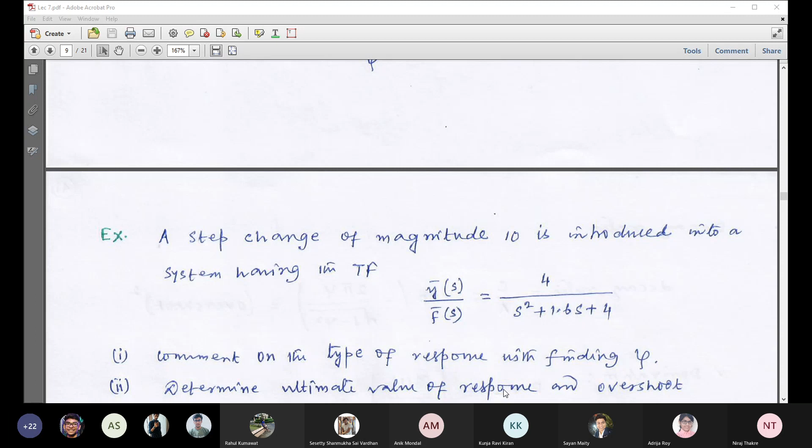Now you find the rise time. Third question is: calculate the rise time.

Rahul Kumawat. Rahul, can you hear me? Rahul Kumawat. No answer. Sneh Bandhu Singh. Yes sir. Did you get the value for overshoot? Doing, sir.

Kunja Ravi Kiran, rise time will be? Yes sir, I am coming to Vardhan. Kunja Ravi Kiran, what value did you get? Yes sir, 1.08, using the formula you told us in yesterday's class: TR is equal to tau by root over 1 minus zeta square, into pi minus tan inverse of root of 1 minus zeta square by zeta.

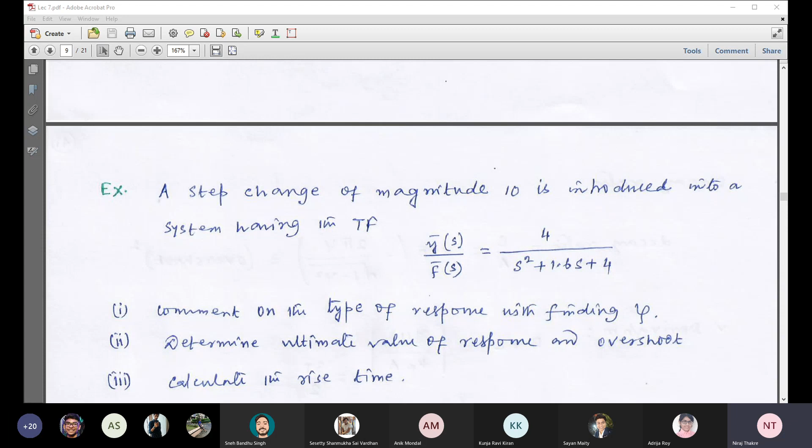See, I am showing the answer now. I think most of you did it. So you fix your target to make the last term in the denominator polynomial 1.

Always you try to do it: make the last term in the denominator polynomial 1. Then the equivalent term we know is tau square s square plus 2 zeta tau s plus 1. Accordingly, you can get the values. I repeat, the last term in the denominator polynomial, you try to make 1, and then compare with the standard transfer function to find all these values: kp, tau, and zeta.

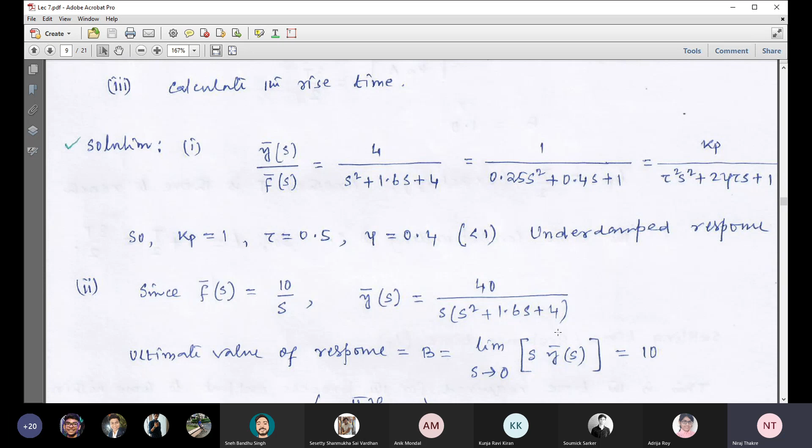Okay. Ultimate value of the response we get by using the final value theorem, shown here in the Laplace domain. You can also use the time domain, where limit t tends to infinity, y of t is there. But it is wise to consider the formula in the Laplace domain, because the transfer function is given in the problem.

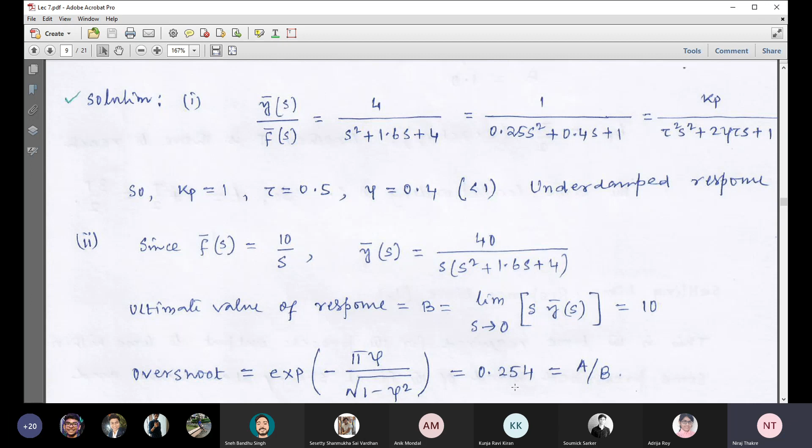For overshoot, directly we can use our equation, since all the values are already determined. Only one value is needed, that is zeta. And then the last question was rise time, which requires the expression needing two parameter values: one is tau, another one is zeta.

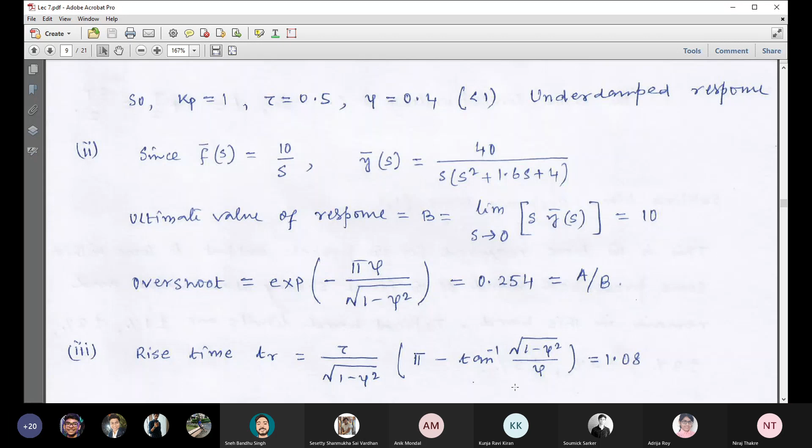So next we will start the second order systems. We already know these two types of second order systems. In fact, we discussed 3 types of second order systems. First one is connecting 2 or more first order systems in series. If we connect 2 first order systems, we will have second order dynamics. If we connect 3 first order systems, we will have third order dynamics. If we connect 4 first order systems in series, we will have fourth order dynamic response.

And the second one is, if we include a controller for a first order process, we will have a second order process. Another multi-capacity process we discussed basically considers the mechanical or fluid element in a process, that is the elemental part. Basically we are discussing the process control part, we need the complete process, that's why we are not considering that.

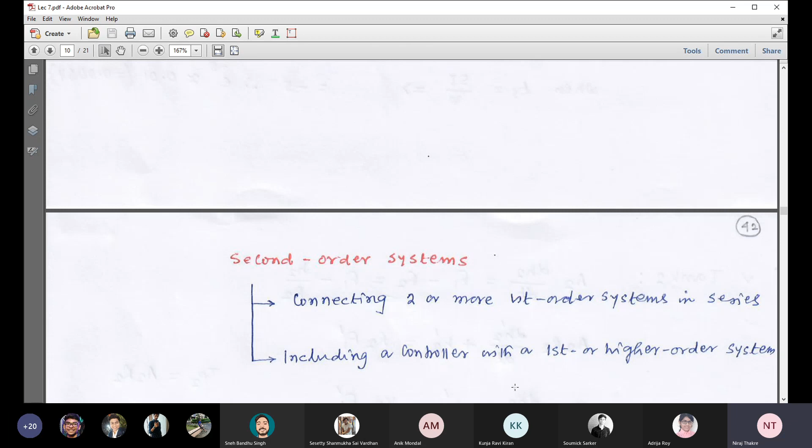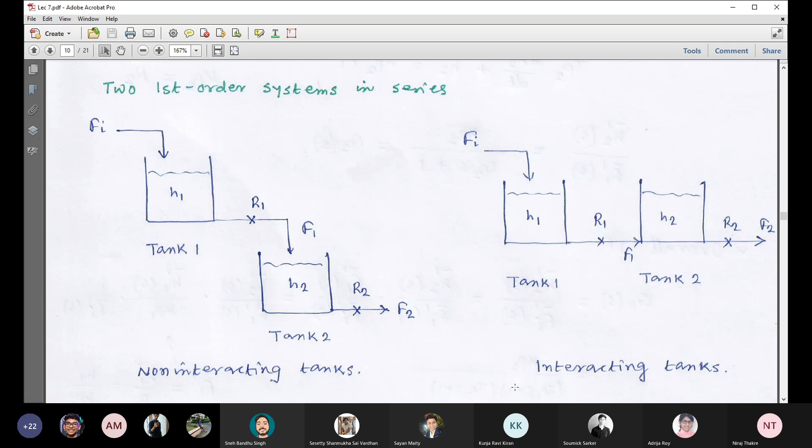Now let us discuss these two system examples. We'll go first with the non-interacting tanks. What we want to see, our target, is we have connected two first order systems in series in both the cases, and we want to investigate whether the overall transfer function is second order or not. This is our primary goal. I repeat, two first order systems connected in series, and we want to investigate whether they are yielding a second order transfer function or not.

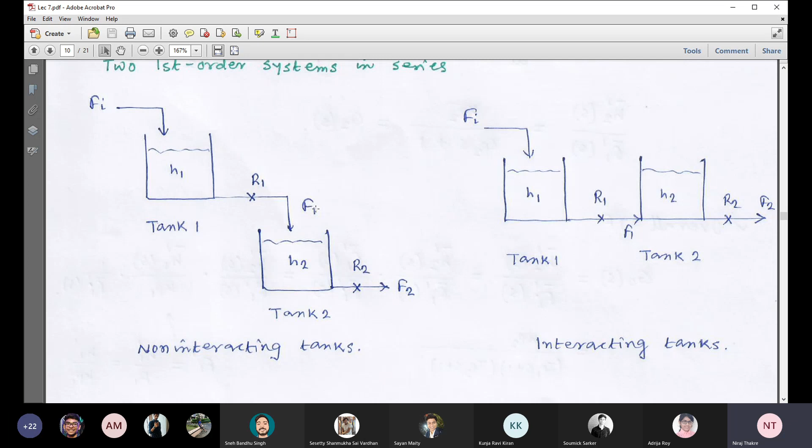Let's consider first these non-interacting tanks. For this we need to develop the individual transfer function for tank 1 and tank 2, and then find the overall transfer function. I repeat, we need to first develop the model for tank 1, followed by tank 2. Then we will develop the individual transfer function for both the tanks, and finally find the overall transfer function. We want to check whether that overall transfer function is second order or not. Let's proceed.

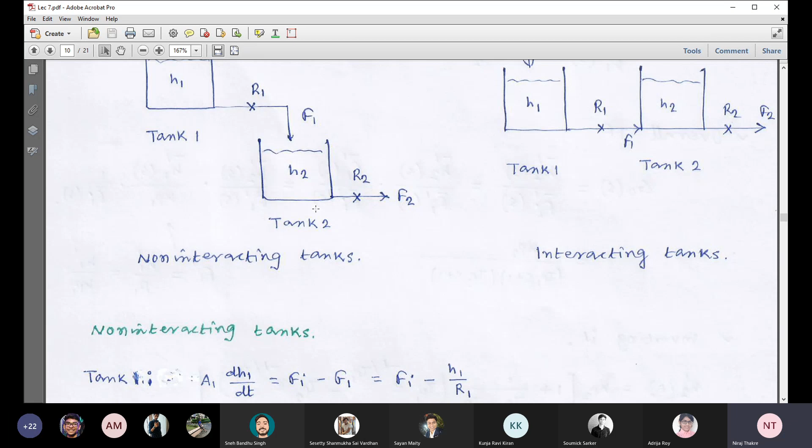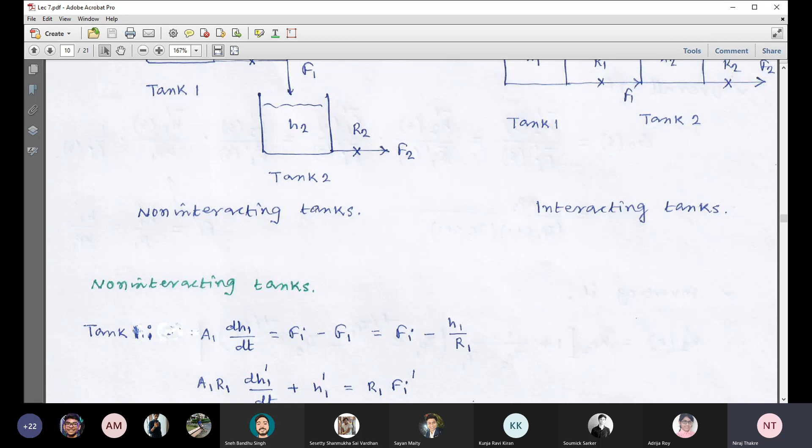This is the model equation for tank 1. So we can write it in terms of deviation variables. I already mentioned that we can directly write the model equation in terms of deviation variables. For that, you just need to identify the variables and put the prime symbol over those variables.

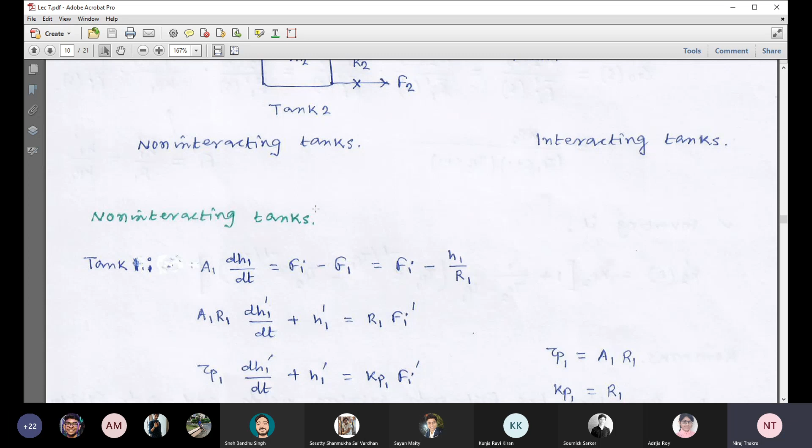Now we can rearrange this equation, or rewrite it in this form. We have written this in terms of time constant and gain Kp.

So what is our transfer function? Our transfer function is output H1 and input Fi. So output by input equals Kp1 by tau p1 s plus 1. So for tank 1, this is our transfer function G1, which is obviously the transfer function of a first order lag system. This is the transfer function for the first tank, and we are expressing it by G1, and this transfer function is nothing but the transfer function of a first order lag system.

Can you now determine similarly for tank 2? Do it quickly. Let me know the transfer function for tank 2. Just follow this same approach.

Find the transfer function for tank 2. I have shown for tank 1. Now you go for tank 2. It is quite similar.

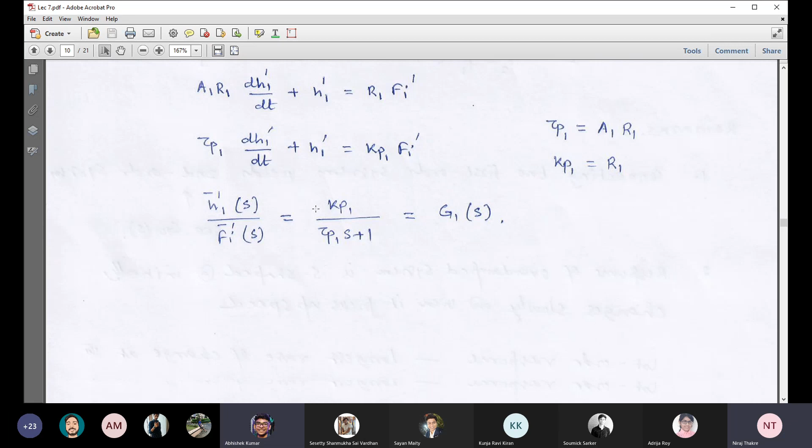Yes. Anyone else got? Yes, sir. Same expression you got? Yes, sir. Kp2 upon tau P2 S plus 1, and Kp2 is R2 and tau P2 is A2 into R2.

Yeah. Now verify, I'm showing now for tank 2. Fine.

So what should be the overall transfer function? Tell me what should be the output, what should be the input in the overall transfer function. Overall means we are just considering both the tanks. Can anyone tell what should be the overall transfer function for both the tanks?

Sir, Kp2 divided by tau P1S plus 1 into tau P2S plus 1. Oh, great. What's your number? 19CS10009.

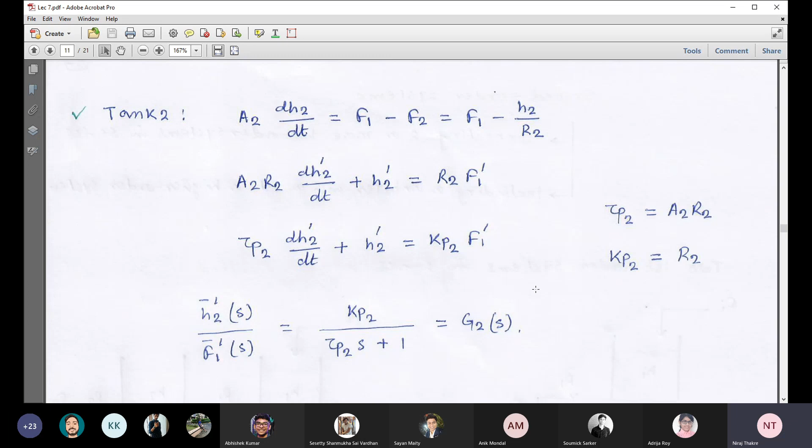See, now I am showing. If you consider both the first order tanks or liquid tank systems, our output is H2 and input is Fi. You can revisit the schematic diagram. If we consider the entire system or both the tanks, our output is H2 and input is Fi. Then it is straightforward to rearrange the transfer function and get the final form.

Okay, so what is your conclusion on the overall transfer function? Are we getting a second order transfer function? I mentioned at the beginning, our goal is to find the overall transfer function and that should be second order. You see, it is second order. So it is at least proved through the example that if we connect two first order systems in series, the overall response is second order response. It is proved.

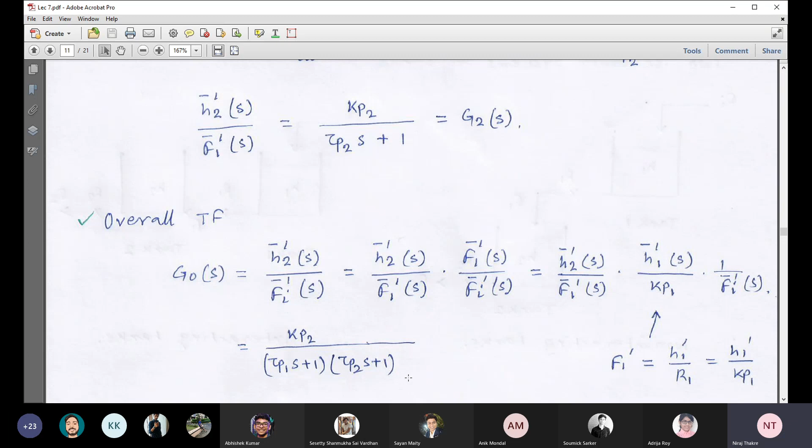Okay, now you come to the remarks. As I told, connecting two first order systems gives a second order system. It is quite obvious from the overall transfer function. Our first remark is, if we connect two first order systems in series, we get a second order system. It is proved through the derivation of the overall transfer function.

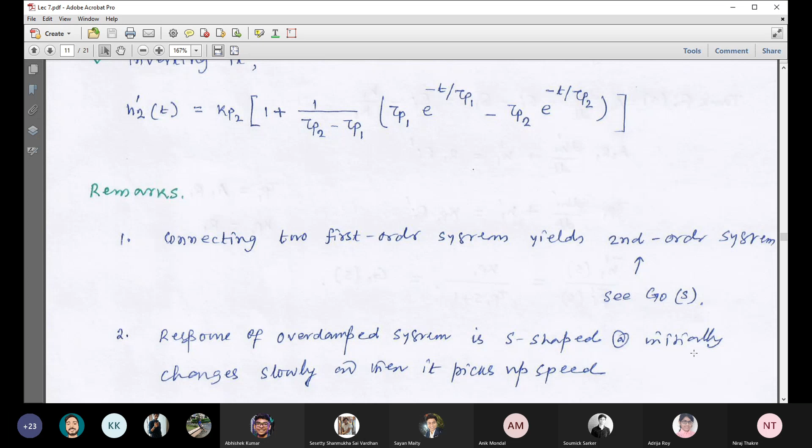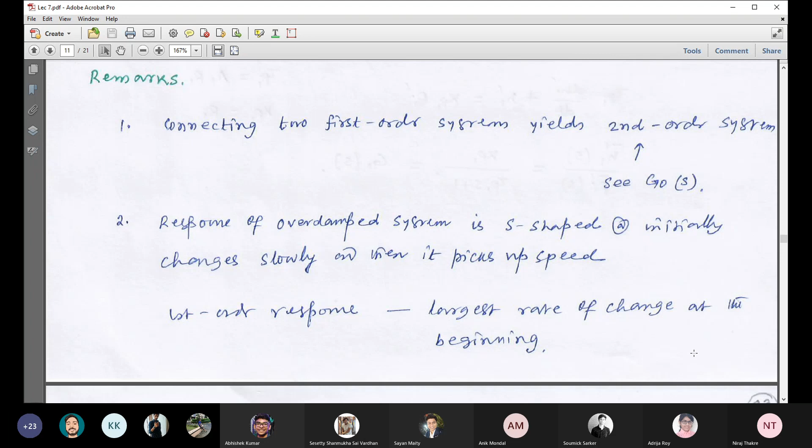And in contrast, for the first order system, the response is faster at the beginning. Okay, so let us see graphically how it happens. You draw this picture. First order response we already got before, and other blue color responses are included here additionally.

The response of the first order system we got previously, from which we calculated 63.2% at t equal to tau p. I think you can recall this red color plot. For the first order system, when t equal to tau p, we got 63.2% response. So this is that plot only, this red curve. The rest 3 we are additionally including here.

Can we draw any conclusion based on this plot? Anyone? Any conclusion from this plot? Student, anyone can add any remark based on this plot? In fact, comparing the 4 curves.

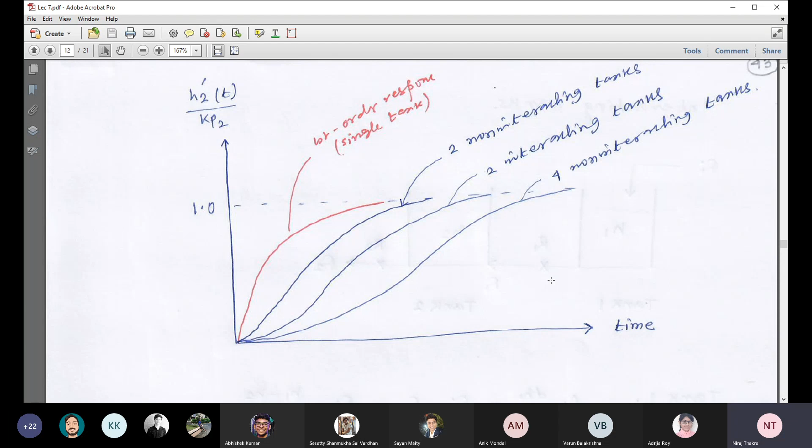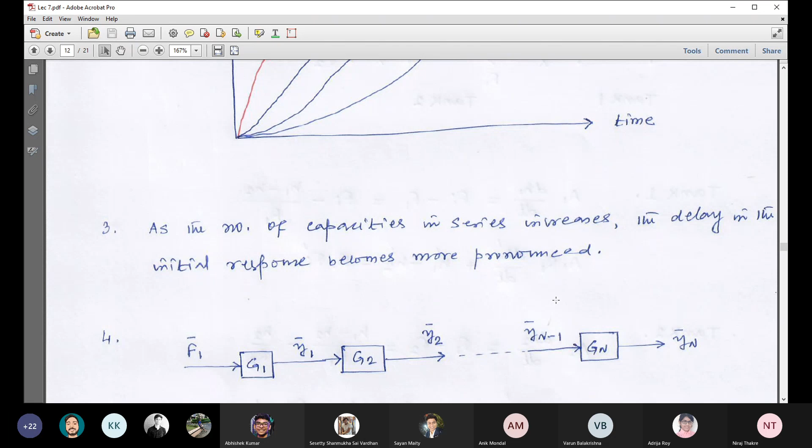And this is the final case. We have considered two first order tanks in series, but we may have n number of tanks connected in series. If that is the case, our overall transfer function becomes like this. For n number of tanks connected in series, we have this overall transfer function.

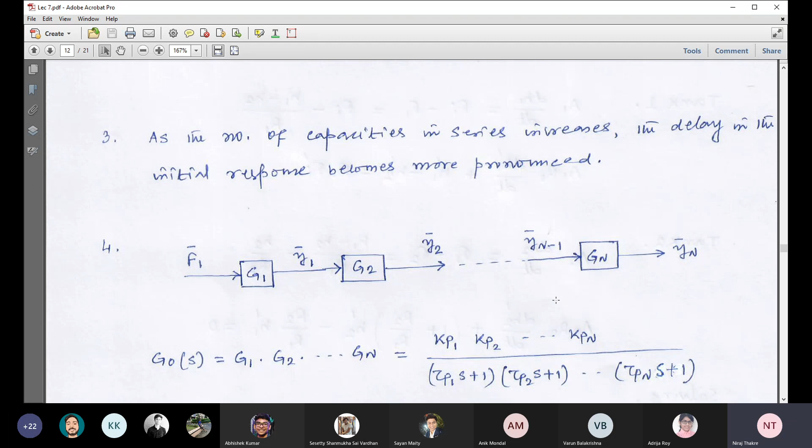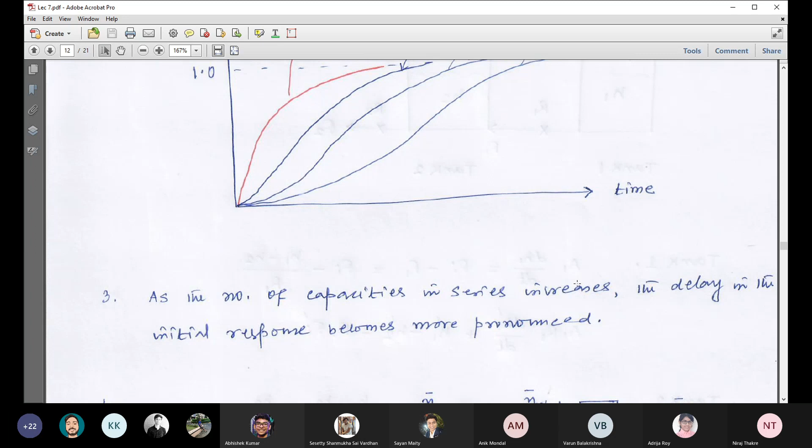Agree? So do you have any question on this for the non-interacting case? Do you have any question? No? If not, let me ask one question. For the two tank system, we got this overall transfer function.

So this is what type of response basically? Is it the overall overdamped system or underdamped system response? I repeat my question: we have considered two non-interacting tanks connected in series, so we got second order overall response. The question is, there are three types of second order response: overdamped, underdamped, and critically damped. So this falls under which category?

So, overdamped. I mean, how were you saying, or as previously shown to us? Oh, this is not the reason. No, give the reason. Or at what condition is it overdamped? Why is it overdamped and at what condition is it overdamped? Anyone?

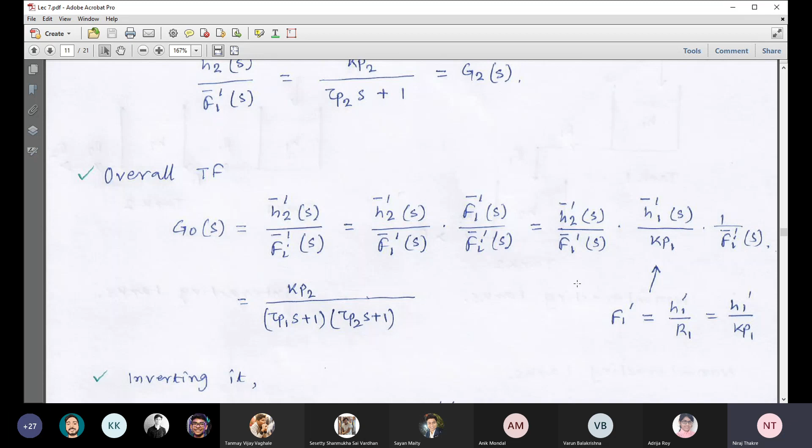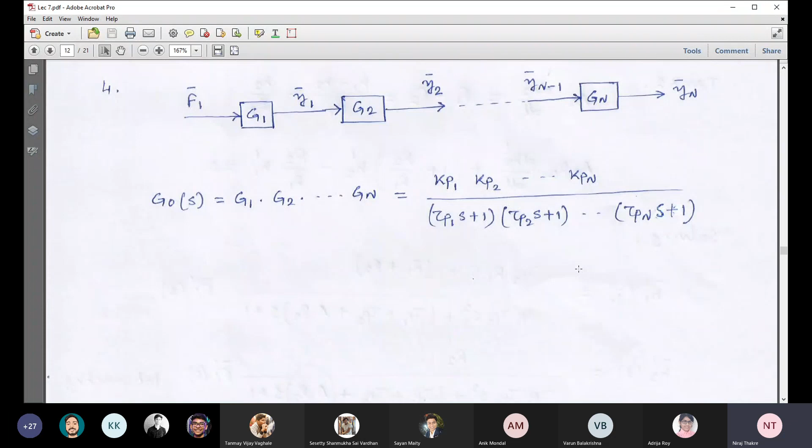Okay, so I think we cannot proceed to the next topic because we have only 5 minutes time. In the next class we'll discuss this interacting tank system, and we want to follow a similar approach. Our goal is also to find the overall transfer function and investigate that it is a second order transfer function. That is the goal, like for the non-interacting tank systems, our goal was to find the overall transfer function and inspect whether it is second order or not.

For the interacting tank also, we'll try to find the overall transfer function and see whether it is second order or not. I think we do not have time to complete this topic, so we'll do it in the next class. Okay, thank you then.